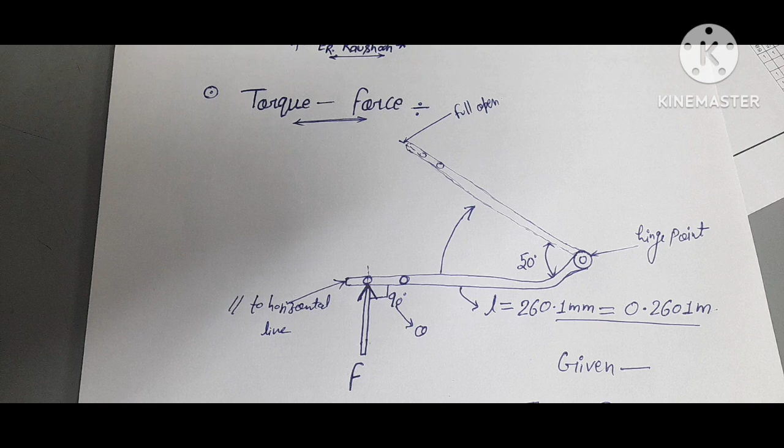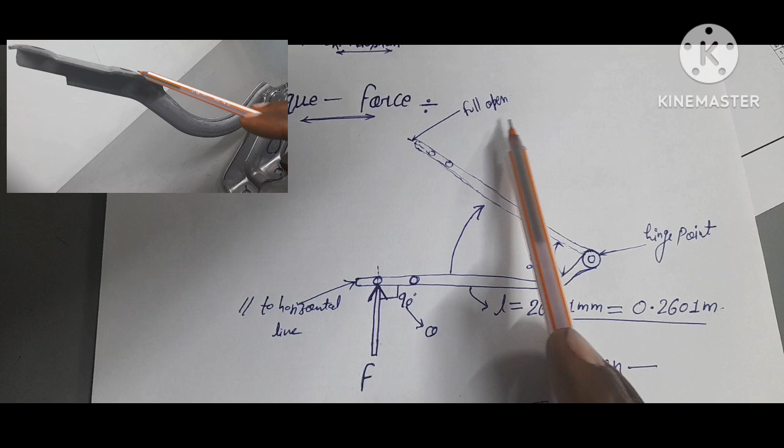Hi friends, today we are trying to calculate the operating force which is acted on this part to open this part, from here to here. You see, this is the actual part, and we apply force here to open this part from horizontal line to full open.

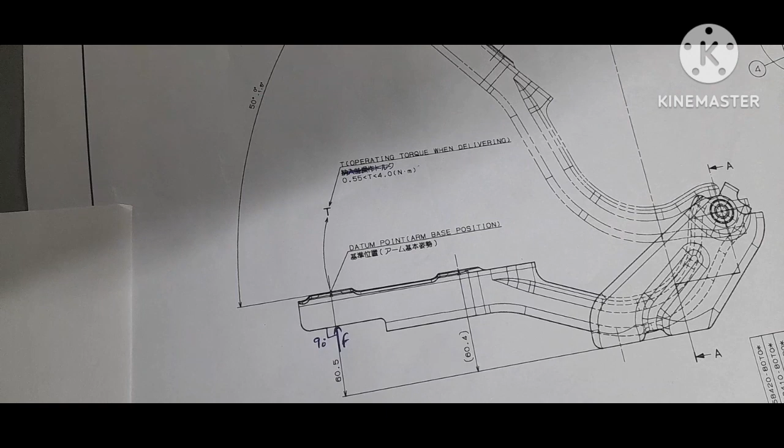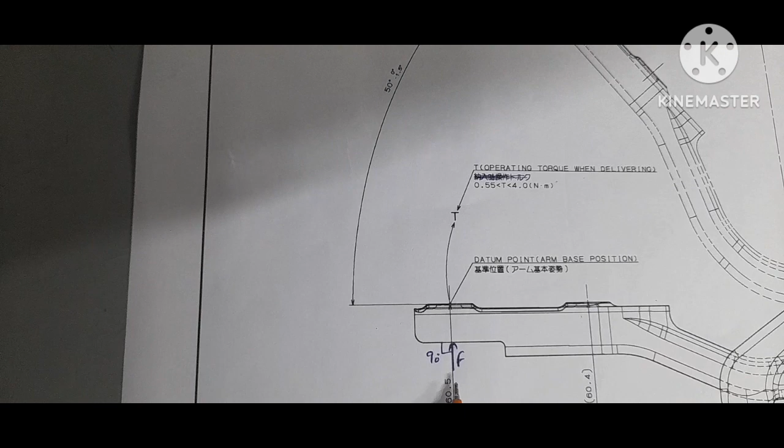So you see what is the drawing saying. This is a rotating point or hinge point of this part, and this arm is parallel to the horizontal line, and from parallel to full open we calculate what is the force required to open this arm from parallel position to full open with respect to this hinge point. So we apply force on this arm like this with 90 degree, and lift off this arm from here, and a torque is given.

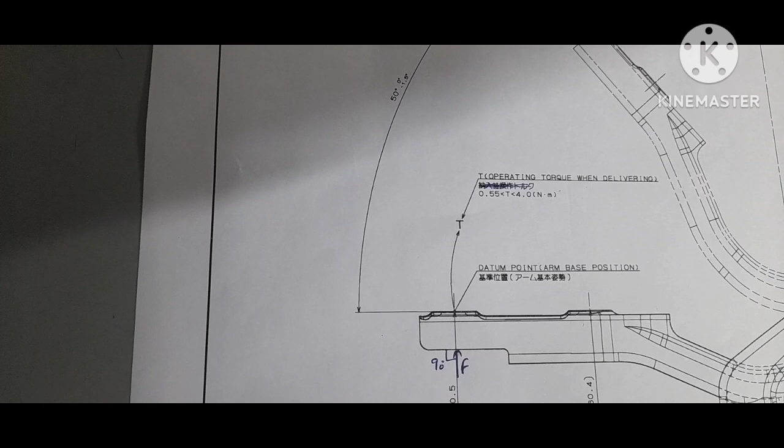The minimum torque range is given here. Minimum torque is 0.55 Newton meter and maximum torque is 4 Newton meter. So we need to calculate force required in this situation. Practically you use this push-pull gauge to calculate force practically, but here I am trying to calculate theoretically what is the maximum and minimum force required with respect to this maximum and minimum torque.

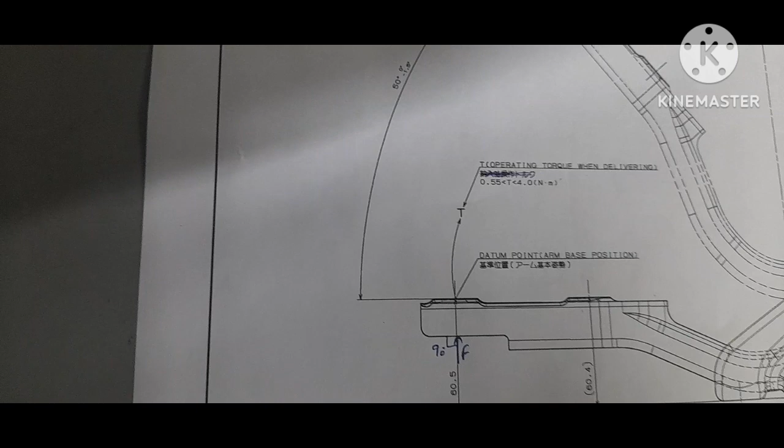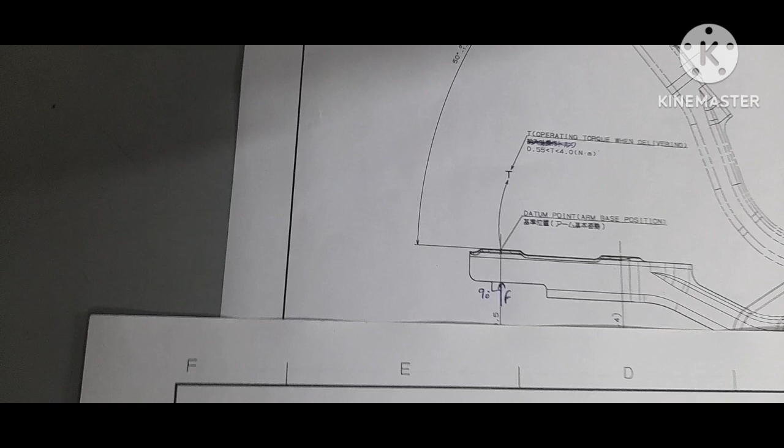So friend, this is a hinge point of arm, and this arm having from hinge point to this second hole point distance is 260.1 mm. So distance is given, and also torque is given here, maximum and minimum. So we need to calculate maximum and minimum force required to lift off this arm.

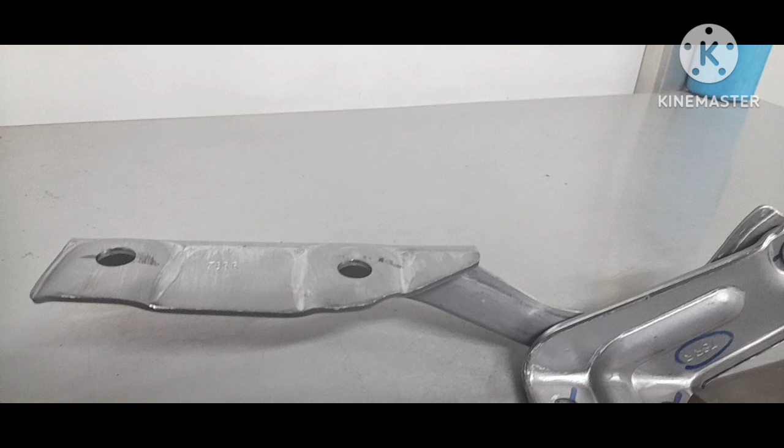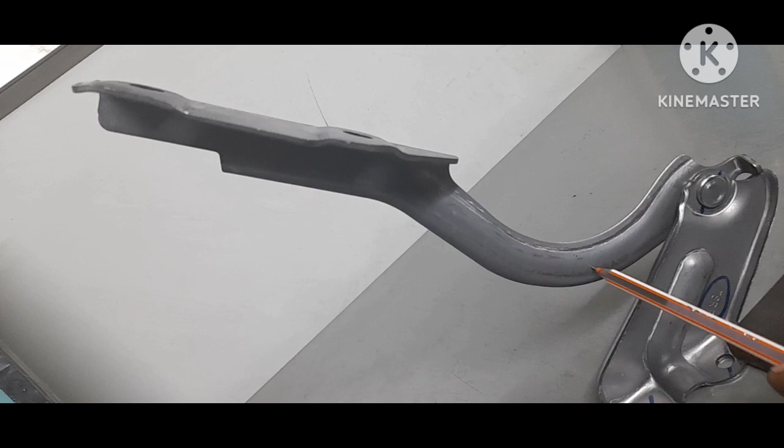So this is a part, and this position is parallel to this horizontal line, and we need to calculate applying force, and force is applied here center to the hole with 90 degree and open, full open like this. This is a full open of this part, and this part is stuck here, and this is full open with 50 degree angle. So we need to calculate open force.

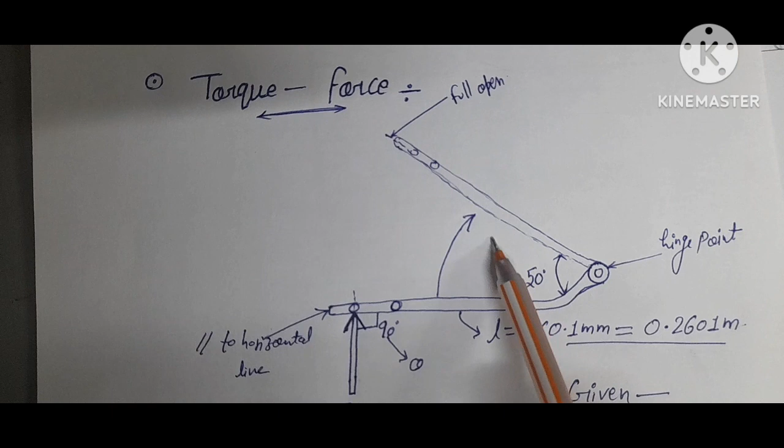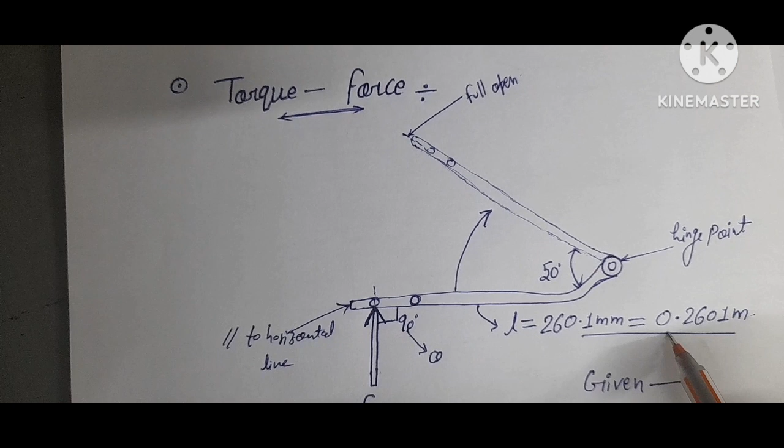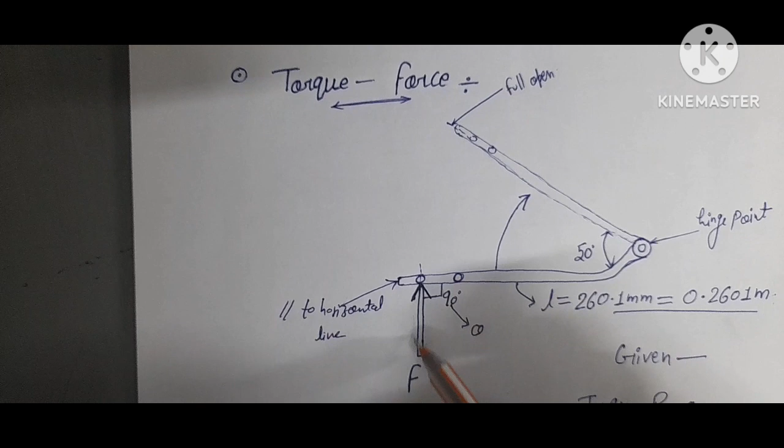So friend, this drawing is drawn on this paper, and this is a hinge point, and the distance between this hole center to this hinge point is 260.1 mm, and after converting to meter it comes out 0.2601 meter. Angle is also given, 50 degree, and the force we apply on this arm to open this arm at 90 degree of this arm, and force is applied like this, and this arm is firstly parallel to the horizontal line. So what is the force required in this?

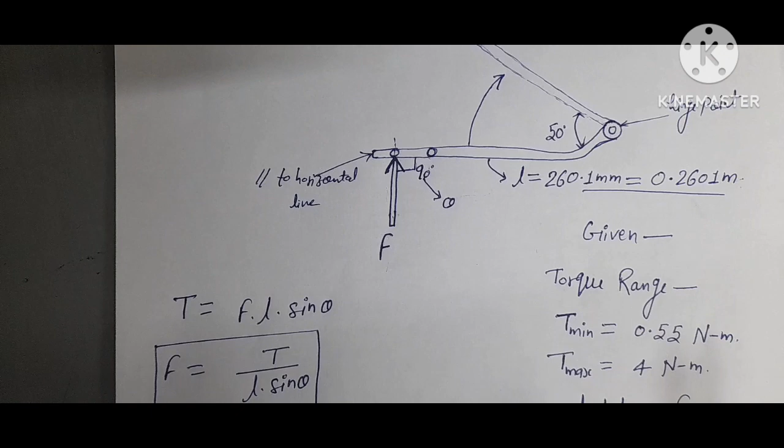Friends, given point is here, torque range is given, minimum torque 0.55 Newton meter you see here, and maximum is 4 Newton meter. So we need to calculate maximum force and minimum force.

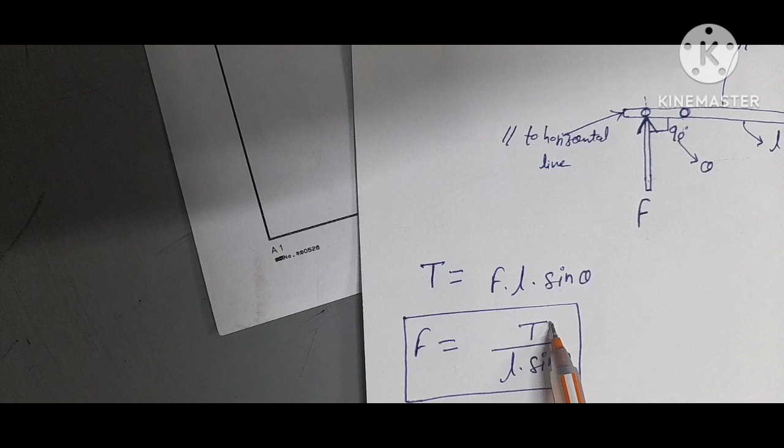So here you see friends, you know the torque formula, torque equals to force multiply distance multiply sine theta. So if you want to calculate force, then force equals to torque divided by perpendicular length multiply sine theta, and here we apply 90 degree, so theta will come out 90 degree.

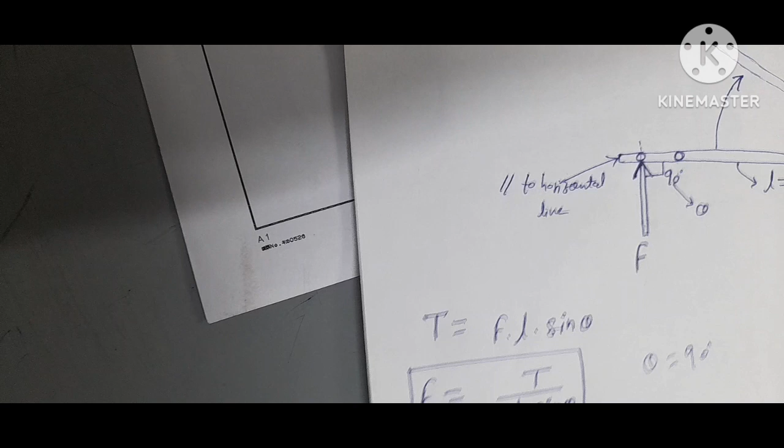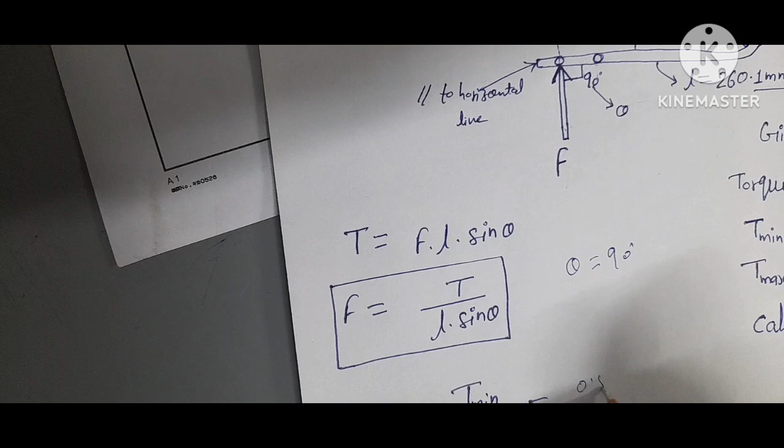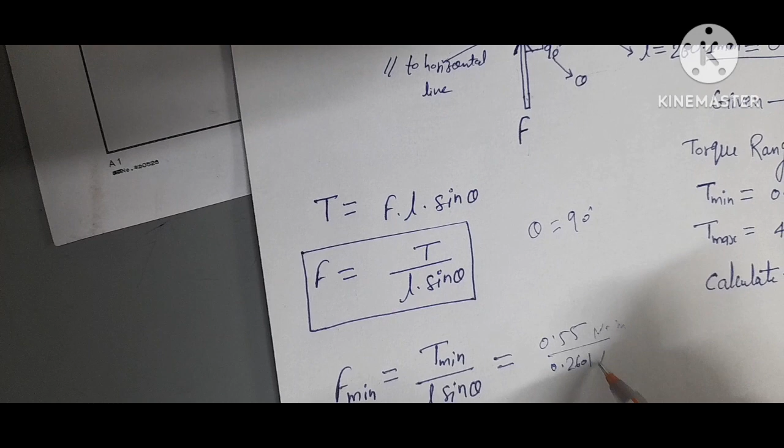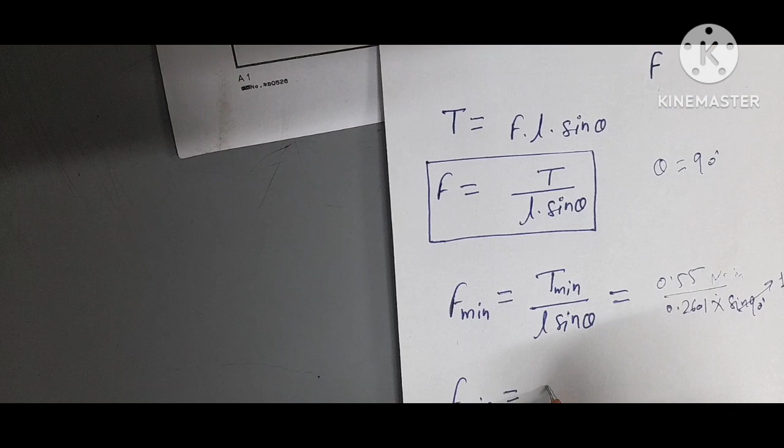So minimum force equals to minimum torque divided by L sine theta, and minimum torque is 0.55 Newton meter. So 0.55 Newton meter divided by 0.2601 multiply sine 90 degree, and sine 90 degree value having 1, so it comes out 2.11. After calculation you got 2.11 Newton. The first minimum force you got is 2.11 Newton.

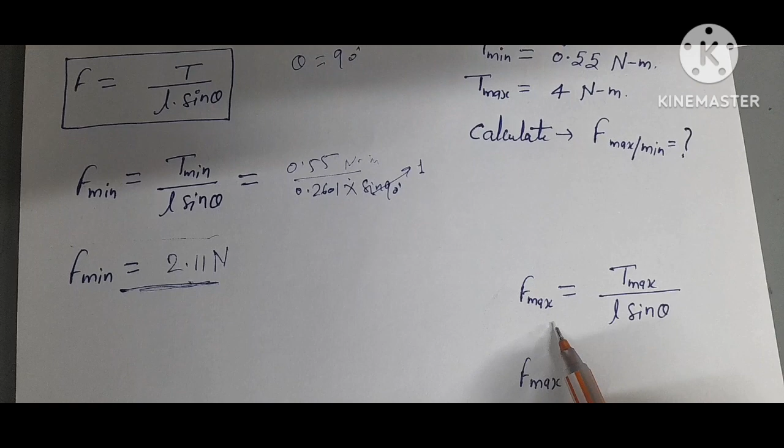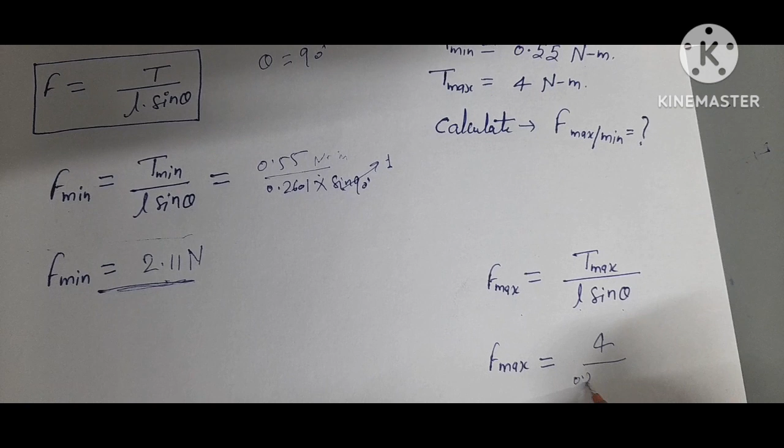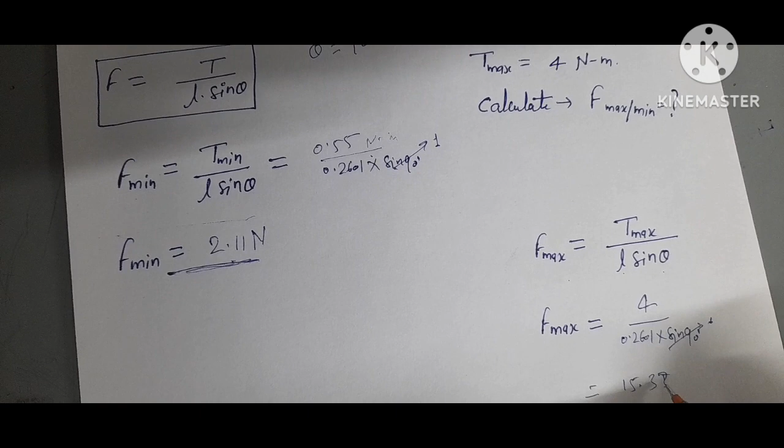And now the maximum force equals to maximum torque divided by perpendicular length into sin theta. So maximum force equals to 4 divided by length equals to 0.2601 multiply sin 90 degree, and this value having 1, and after calculation you got 15.37 Newton. This is the maximum force and this is the minimum force required to fully open up this part.